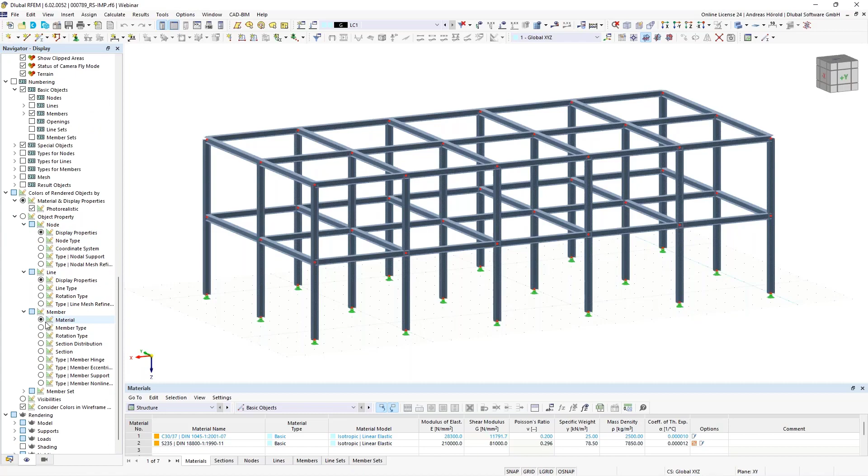And we would like to display the members with different colors. I can show you the navigator display. You can use different settings here, for example the members according to member type and so on, section, and you can see there's the same color for all the same cross sections.

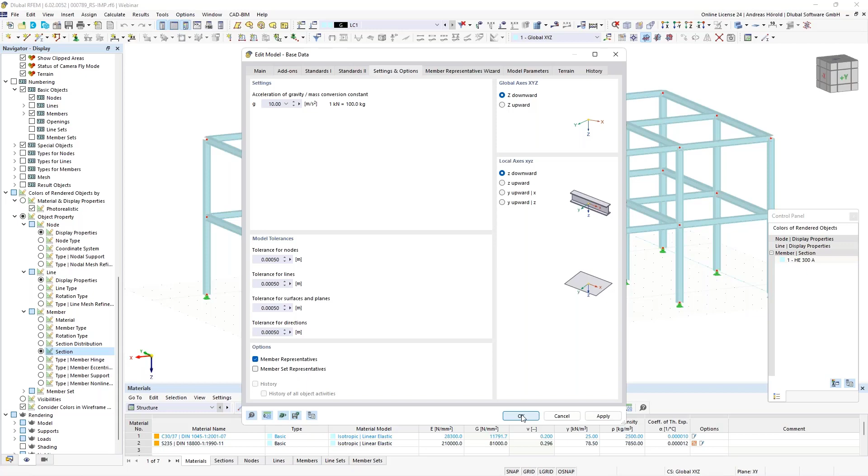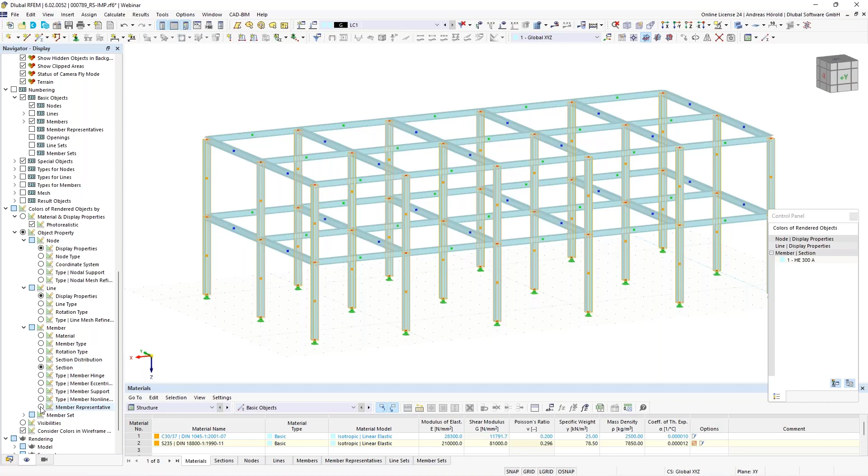I would like to show you two possibilities to show the columns, longitudinal beams, and so on with different colors. At first I start here left above with the base data, go to settings and options, and activate the member representatives. Now you can see the different member representatives, for instance the cross beams, longitudinal beams, and columns, and you can select them here in the navigator display on the left side, member representatives.

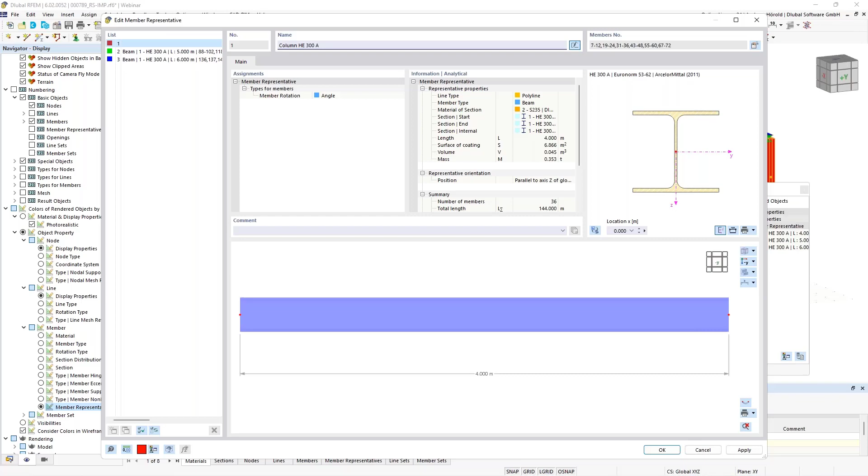And now all the columns and so on have different colors. It's also possible to rename them. If I click on such a member representative, I can edit the name here, for example I call it column HE300A, and I could do that for all. So that's one possibility.

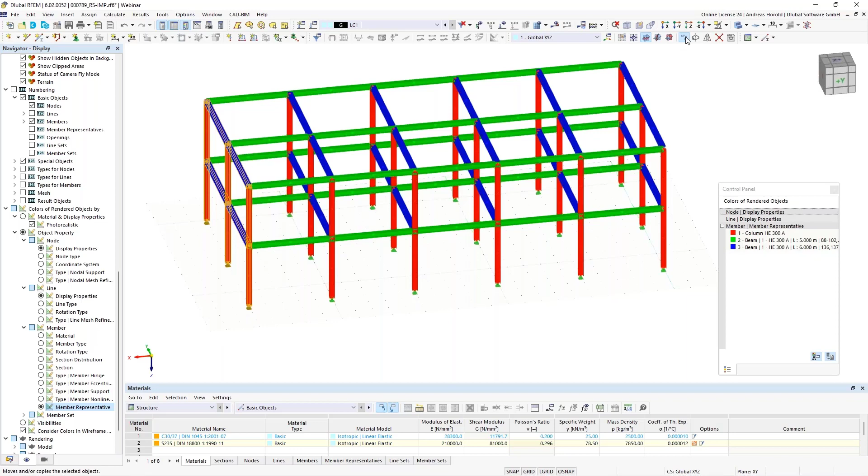The disadvantage is it works now because all the members have different lengths, but for example when I select those here and move them 1 meter in X direction, then you can see those members have the same length, and that's why that option doesn't work anymore. I switch off the member representatives, I can also deselect it here, member representative, then the dots are also undisplayed.

So, next possibility: I create selections, object selections. With a right click in the navigator data, I select new object selection. First I select the members that are parallel to a certain member, I select one member, okay, and I call it column.

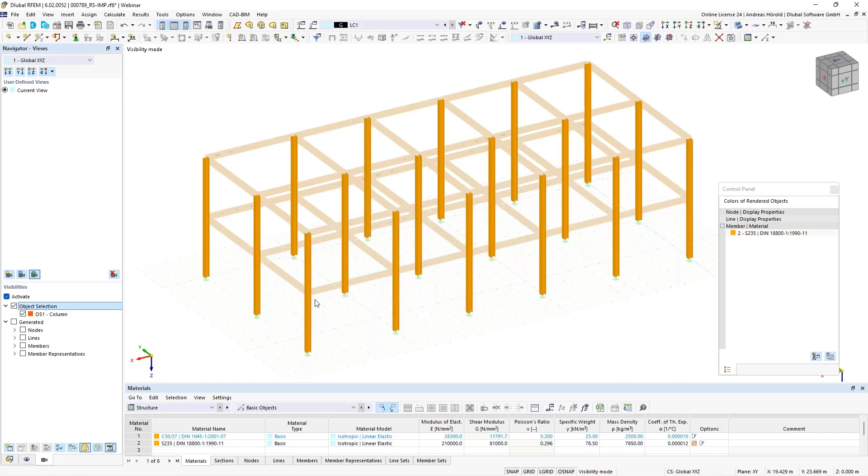And how can I display it? So, for example, that's the first selection, and you can see it also in the navigator views. So we continue with the next object selection. I have to activate all again.

New object selection, same workflow: members that are parallel to this member, for example, and I call it longitudinal beam.

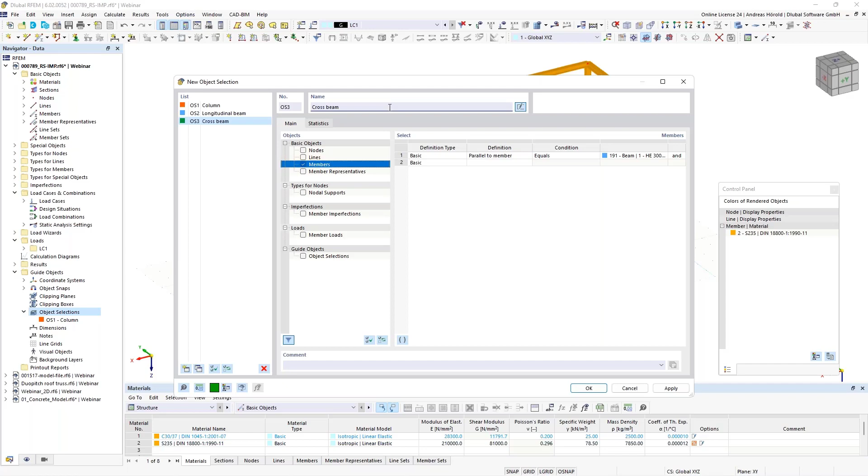Next selection: again, members that are parallel to this member, and I call it cross beam.

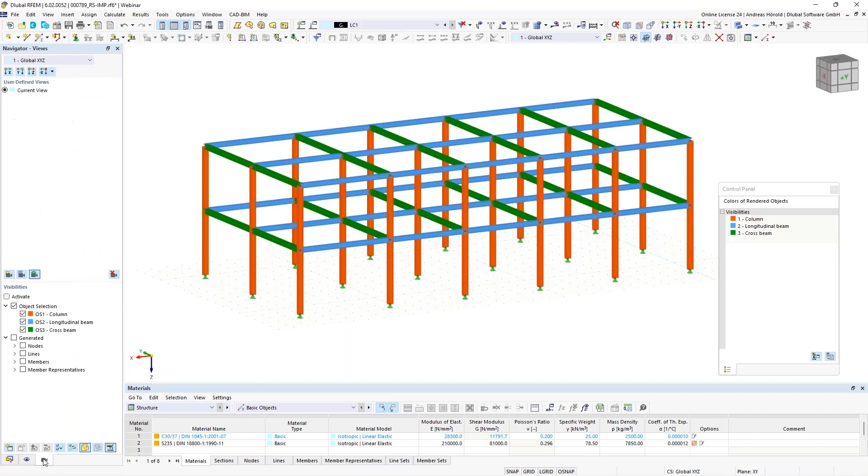So now you can switch to the navigator display, scroll down, and check visibilities. And now all the members have different colors, and the next advantage is you've got the views, the certain views. You can activate, for example, columns, longitudinal beams, cross beams, and so on.

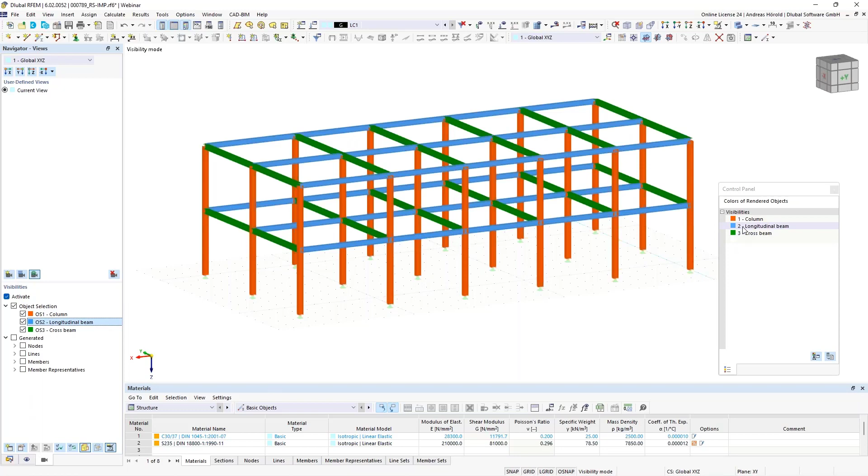And you can also change the color if you want, for example yellow. Okay, I think it's a nice solution - you've got the views in the navigator views and the colors in the rendering according to the visibilities. Okay, that's all to this question.

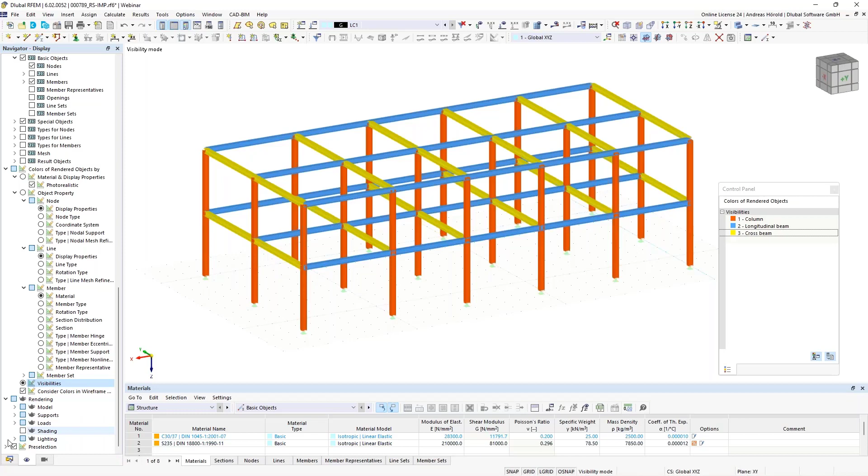We turn to the next model, such a small steel hall, because the question is: where can I activate the lack of correlation in the load wizard of RSTAB 9 and RFEM 6? Now you can see this building with small height and so on. If the wind load for buildings or structures is to be determined by the simultaneous assumption of aerodynamic pressure and suction coefficients on the windward and leeward sides of the building, the correlation of the wind pressure on zones D and E of the wall surfaces may be taken into account.

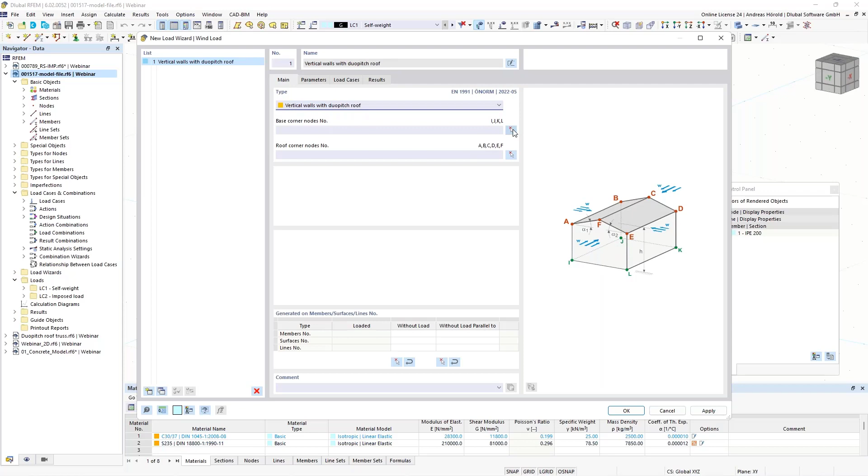I would like to show that in an example. I create a wind load: here left above, insert, load wizards, wind load wizard. So now I open the dialog box. At first I select vertical walls with duopitch roof, and I have to select the base corner nodes. Now that's quite easy for that model, and the roof corner nodes.

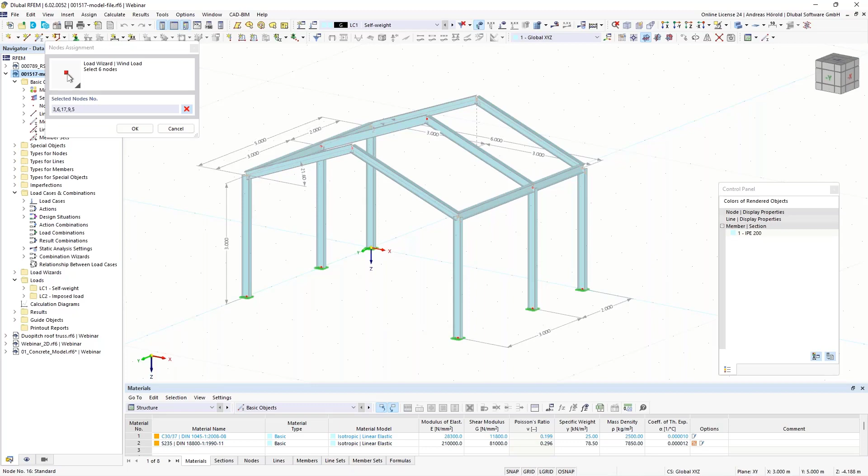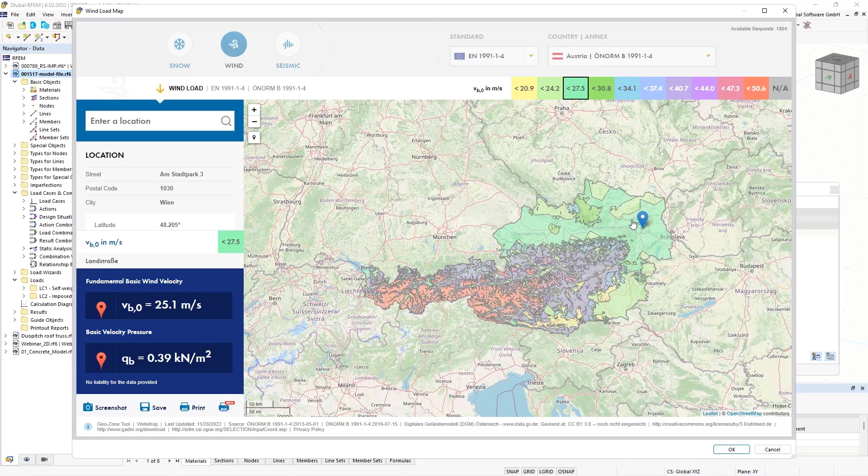Okay. So that's all. And then we turn to the parameters. I use the load maps and I import the location. I selected the Eurocode and the national annex of Austria. Yeah, Vienna is selected. I leave that for that example.

What is important to us is here at the bottom, the lack of correlation according to Eurocode. For buildings with an aspect ratio of height to width larger than 5, the resulting force is multiplied by 1. And for buildings with a ratio of height to width smaller than 1, the resulting force may be multiplied by 0.85. And intermediate values are linearly interpolated.

So I create a load case at first, and then let's turn to the results. And we take a look at the zone D and E. We remember the wind pressure and suction, 0.56 and 0.20. And if I go back to the parameters and I select the lack of correlation, then the loads should be decreased. Yeah, you can see it was 0.56 and it's now smaller, and also the minus wind pressure on zone E.

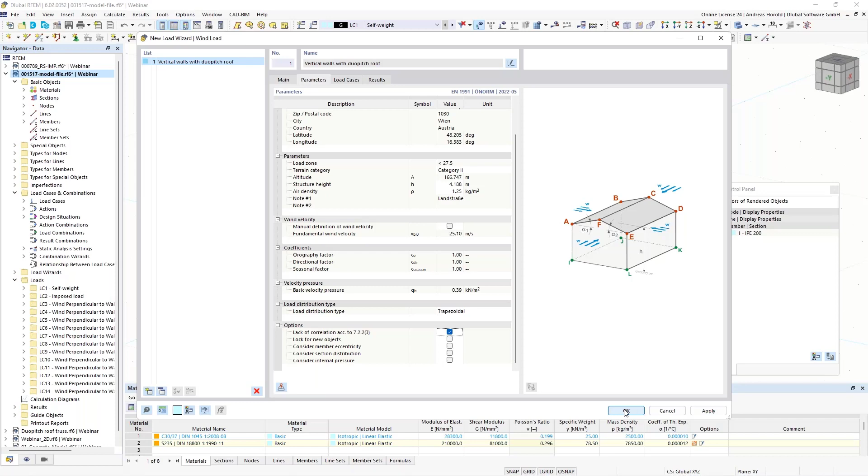Okay, then we turn to the next question. RFEM 6 crashes directly after the program start. What can be the reason? Recently, the graphics card was mostly to blame for crashes occurring after the program start or extremely slow program reaction.

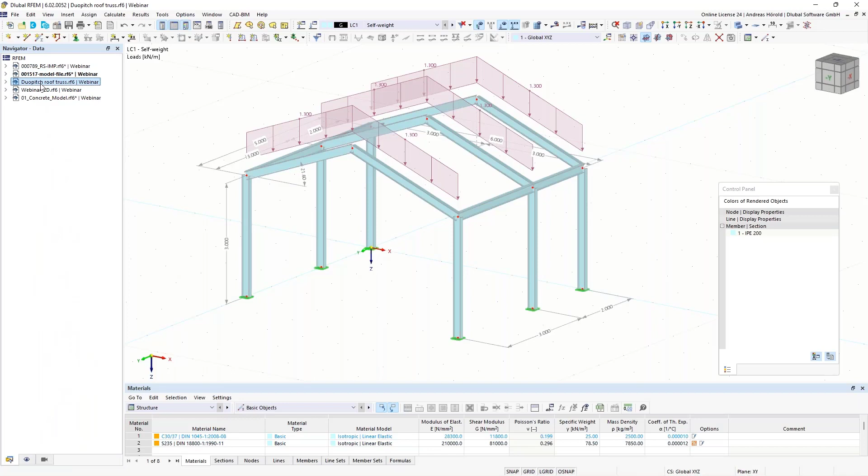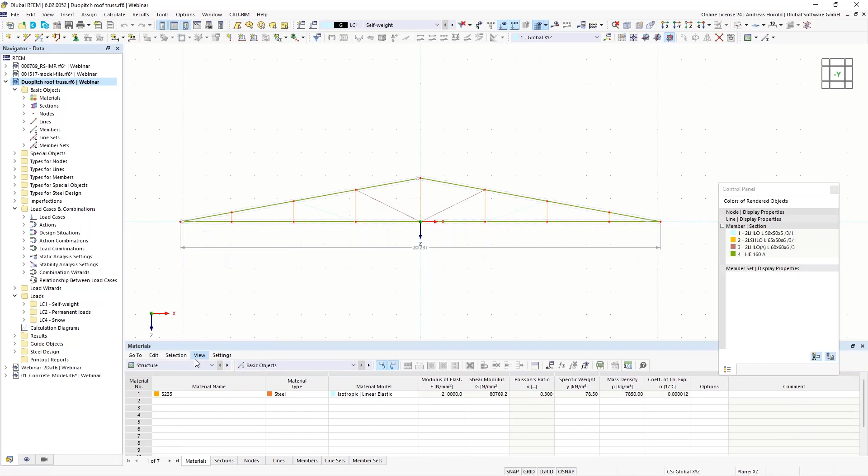So the next question is, it is not possible to design double angles for my model using the steel design add-on. Every time I try it, the program shows information about the invalid section shape. Okay, let's do the steel design. You can see the error message. And you can see that member is not designable because of the invalid section shape for the design.

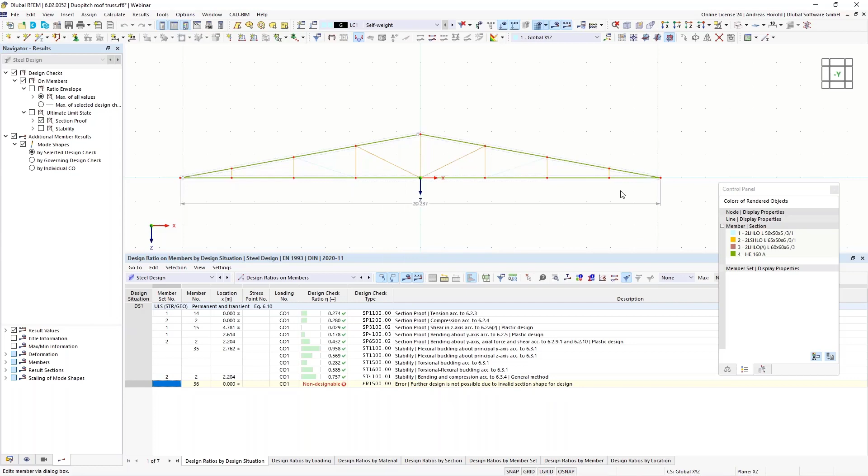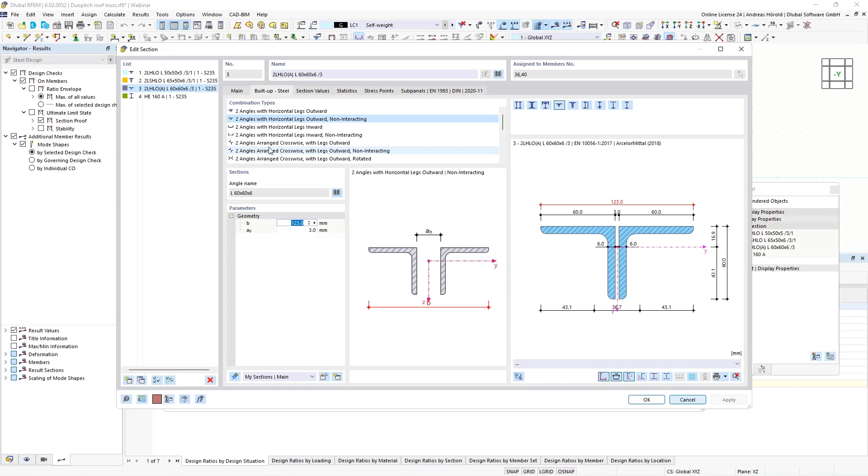So I can select the two members. And then members, edit, and I can edit the section. It's a built-up steel section, and the design is not possible for the non-interacting combination type, that one. But cross-sections without this property can be designed by the add-on, for example, this one.

And now you can see the shear. The interaction of members can be affected in RFEM by the T value. It's taken into account when calculating the shear areas and depends on the formation of the bracings.

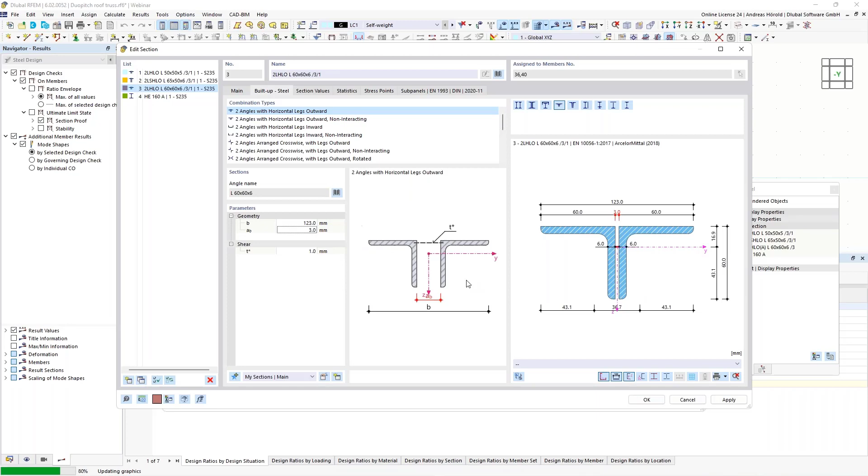I leave one here. I select new section, L 60 by 60 by 6. Okay, 123. Okay, that's all. That should be sufficient. I start the steel design again. And now it should work.

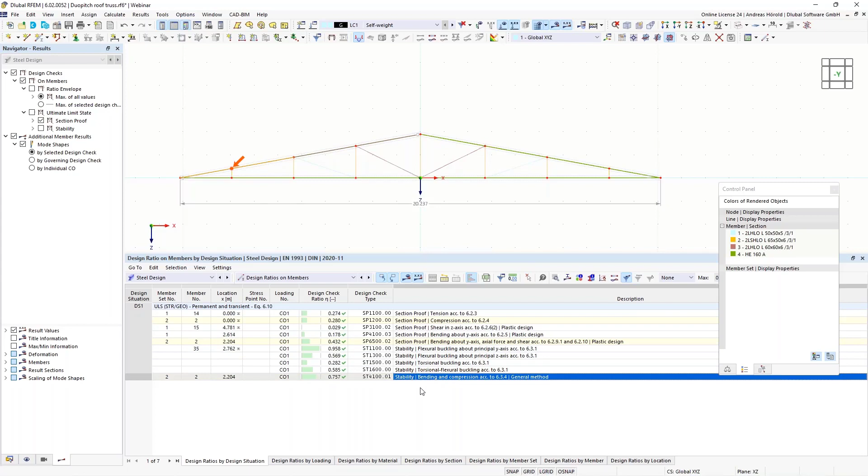Okay, now we can see the stability design. We don't get any error message, and that's why it works now, because of our changing of the cross section.

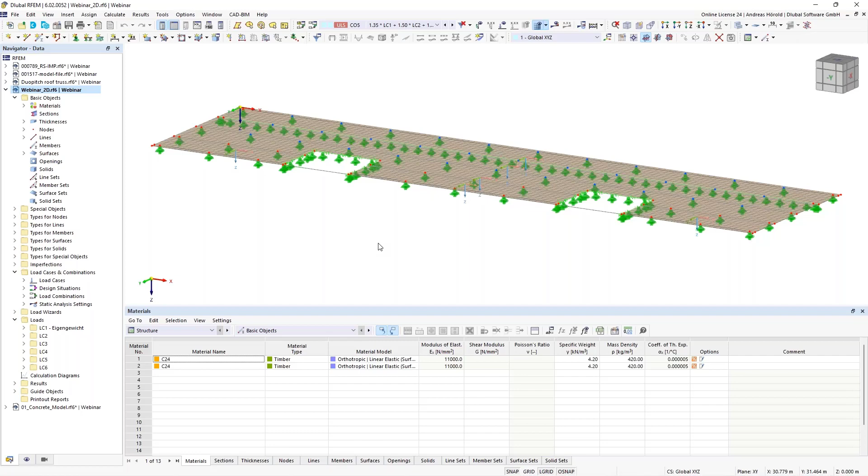Okay, then we turn to the next model and the next question. Next question: is it possible to display the sum of forces on a line hinge for the dimensioning of fasteners later? Yes, that's possible. With regard to the dimensioning and choice of fasteners to be applied between the two surfaces, it's useful to know the resulting forces or moments between these surfaces.

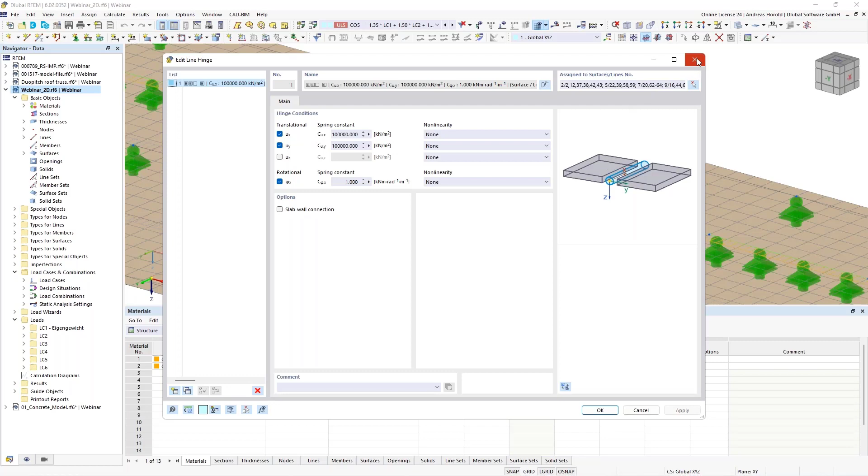We have got a line hinge here, we can double click on it. There are springs, a very small spring around the x-axis, and a higher spring constant for the translation in x and y direction. Okay. So, if you want to see the results, we can do a right click and then turn to the result diagram.

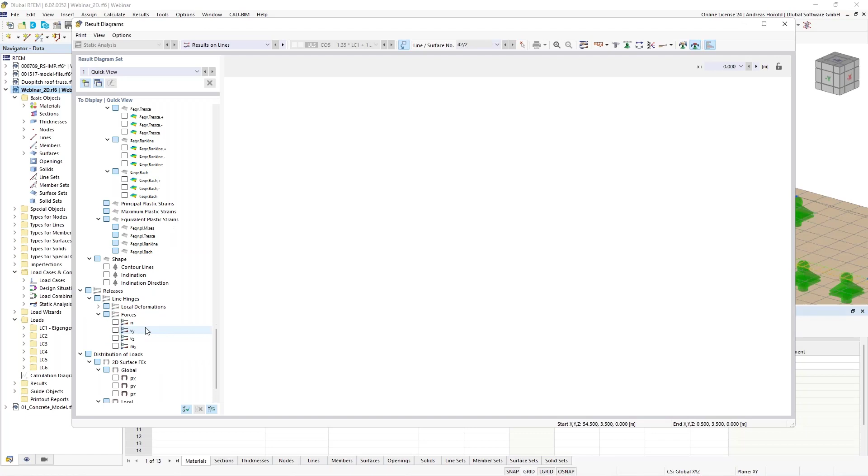And then you have to scroll down. It's quite at the bottom. And then you see the releases here, line hinges, and the forces. What's interesting to us is Vz, and Vy is 0. And then right above, with that button, you can edit smooth ranges of the result diagrams.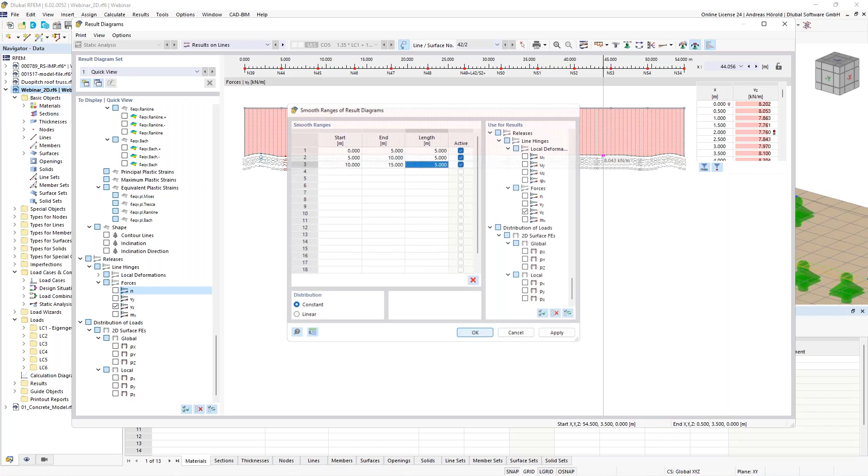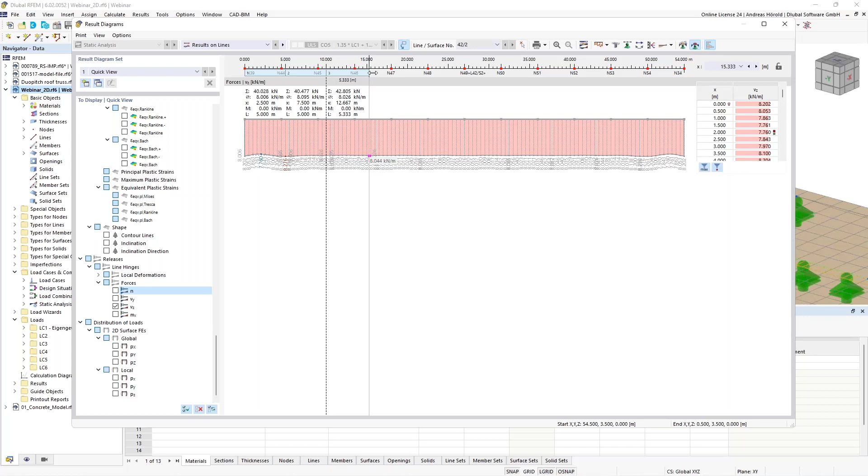And now you can see the sum of that area here of the 5 meters, about 40 kilonewton. That's quite similar for our areas. And the average is about 8.1 kilonewton per meter. And that would be the value for the dimensioning of your fastener. You can also modify the area. You can extend it, for example, and you can see the average is nearly the same over the length of the line hinge.

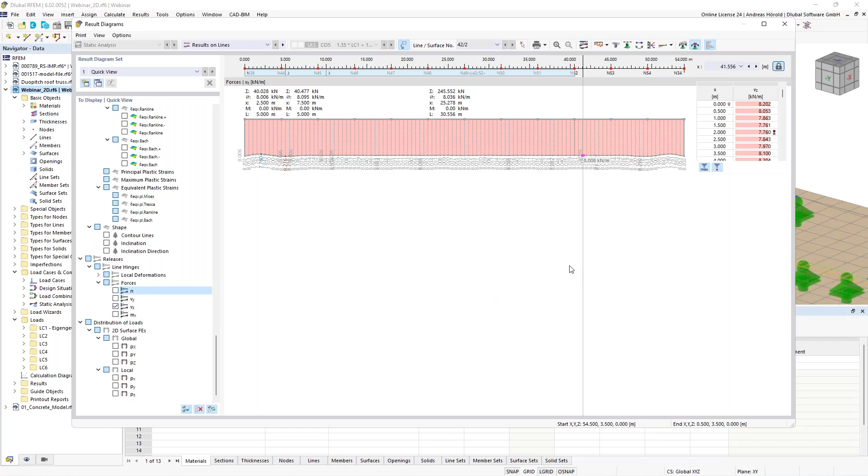It's also possible to print that directly to the printer, to the printout report, to a PDF, to the clipboard, or to a file. A file would be a PNG or JPG file. That would be possible. Okay, that should be all to that question.

Then we turn to the last model and the last question. It's about concrete design. The question is, when modeling and calculating downstand beams made of reinforced concrete in RFEM 6, is it recommended to always create member sets? I have to say yes. At least if there are 2 or more members that act as a continuous member, then modeling with member sets is recommended. We did it in that example because this is the only way to consistently determine the reinforcement for the entire structural components. It's an advantage, especially for the calculation of the anchoring lengths.

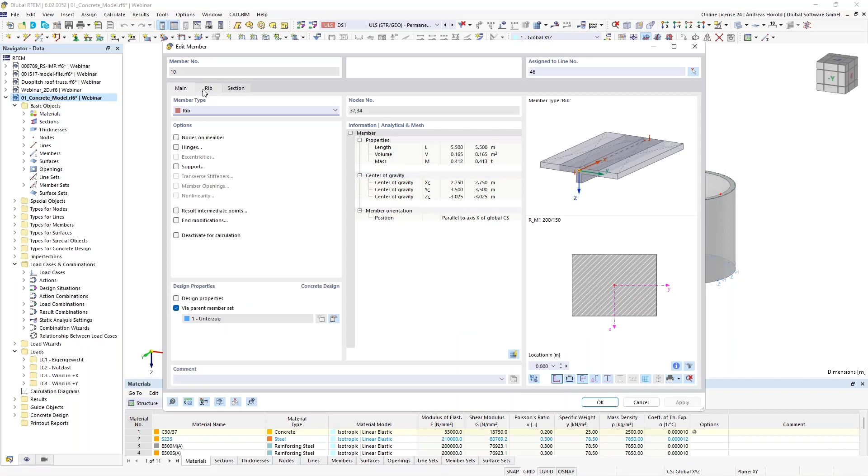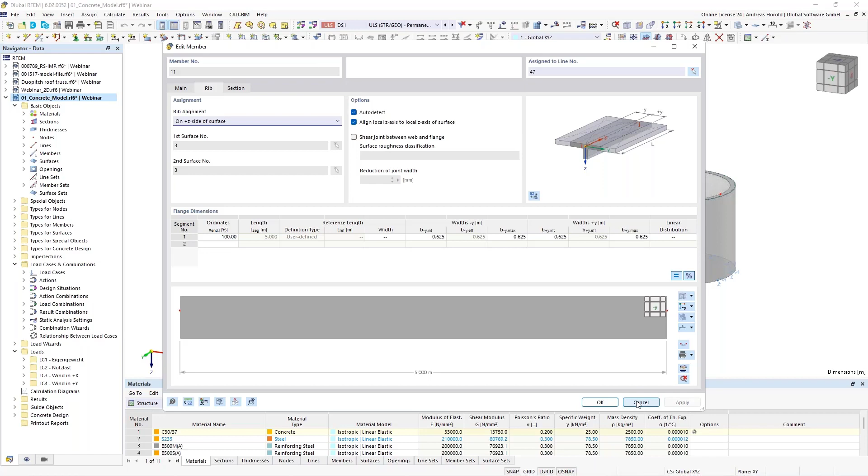Now we've got ribs here, and for ribs, the effective width is not determined along the complete member set. In that example, 1 member was defined for each span. For example, we can double click on it. You can see the rib, and you can see the flange dimension is 69 centimeters for that beam, and for that rib it is 62.5 centimeters, because of the different span of the beam.

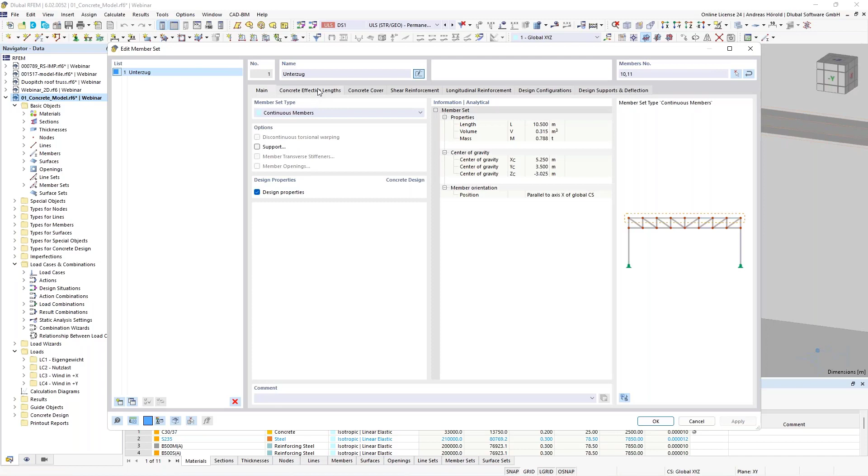Yeah, and if I click on the member set here on the dotted line, then you can open that dialog. You can select the concrete effective length, concrete cover; the concrete durability for that example is XC1, with a nice graphic. It's dry or permanently wet in our example.

Then the shear reinforcement. It's possible to define several reinforcement areas without effort on the member sets. This way the shear reinforcement can be quickly defined, for example above the center walls, by smaller spacings or different rebar diameter. You can see the spacing is 10 centimeters and the diameter is 14 in that area here. And here we have a larger distance between the stirrups.

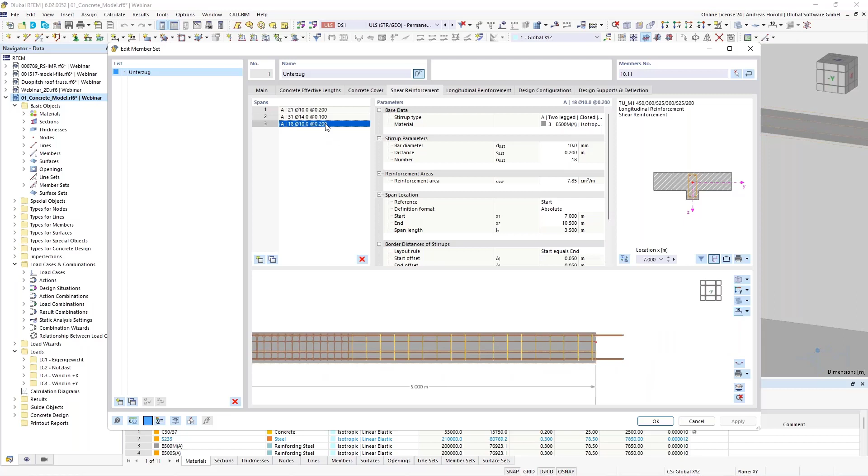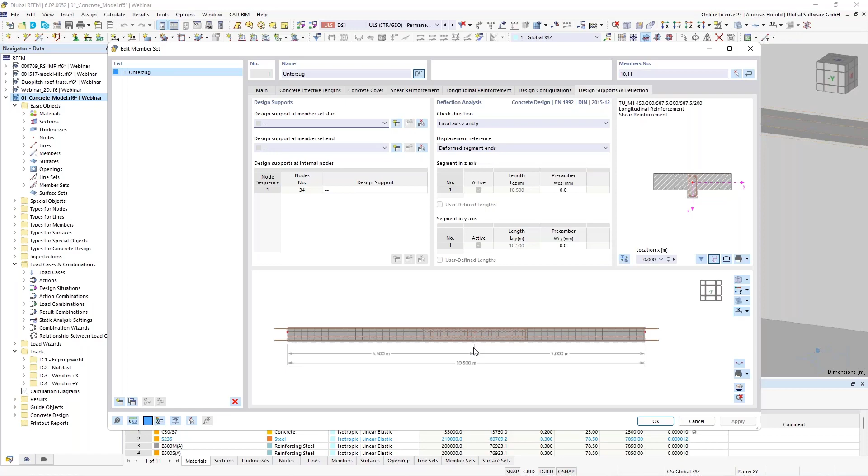So then the longitudinal reinforcement is continuous, also over the supports here. Then you can see the anchoring lengths and so on. Okay. And it would also be possible to design supports for the deflection analysis. Okay. And if I applied it, I can also let the program display the reinforcement.

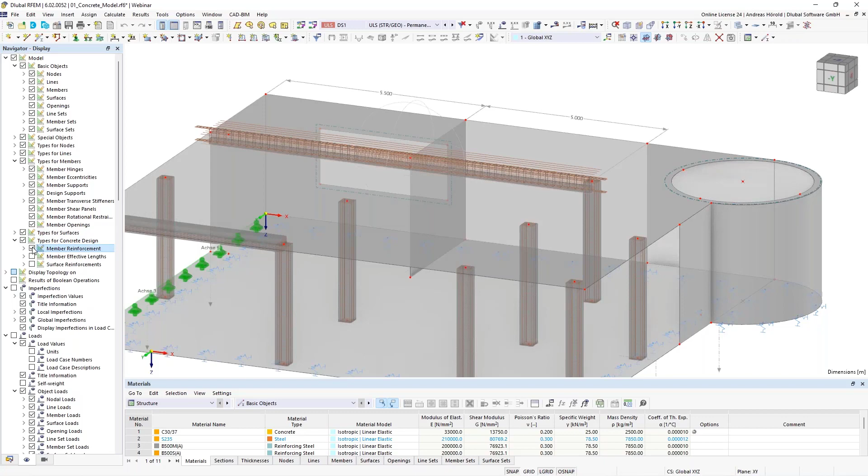In the navigator display, you can search for the types for concrete design, the member reinforcement, and the surface reinforcement. Okay. And that's the reinforcement of the member set that we recommend to define.